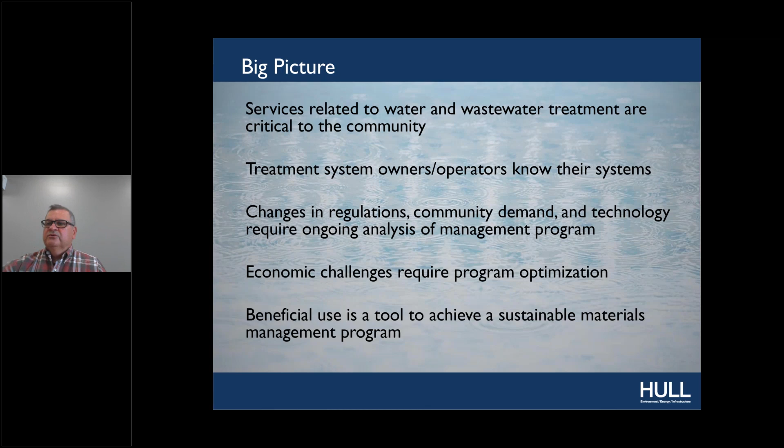Today I'm going to hit on two silos, one water and one wastewater. There's some overlap between the two common themes, but I'm going to separate water from wastewater and go from there. What's not included today is system design, process analysis, special technical cases—I'm sticking to big picture views of material management as it relates to waste from both processes, water and wastewater.

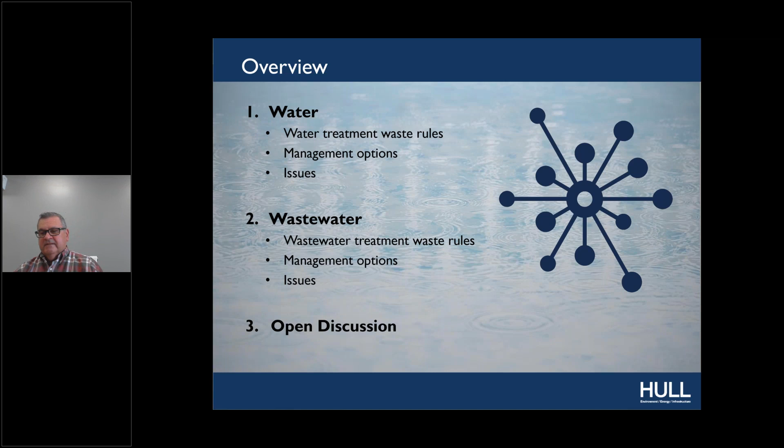So we're going to hit on a first question. I've embedded four of them here. I'm not sure what order they'll end up with other questions, but I'll turn it back to TMACOG to pose the question. This first question is: are you confident that you understand your water and wastewater waste management programs and are planning for the future? The potential answers are yes, somewhat, no, or not sure.

And Bill, while we're waiting for those responses to come in, I've got a question for you. Can you give us your opinion on how you think Ohio EPA is embracing beneficial use and how their perception and willingness to support beneficial use has evolved?

Sure. I think from the biosolids program on the wastewater side of things, beneficial use has always kind of been embedded in the program, or has been for some time. So I think taking some of those principles, some things they understand about risk and waste diversion, and really the regulated community reaching back saying we need tools in our toolbox to manage materials safely and responsibly but look at the economics—I think we've come a long way with the agency. I'll hit on it in my talk, but they started beneficial use byproduct rules, the 599 rules, a couple years ago after a lot of encouragement from the community, and they've had a great response on beneficial use of some high volume, low toxicity materials in their rules, really looking at equivalencies between raw materials and some things perceived as co-products, byproducts, or waste materials. I think they're really jumping in and helping people within the framework of the regulations to apply beneficial use principles.

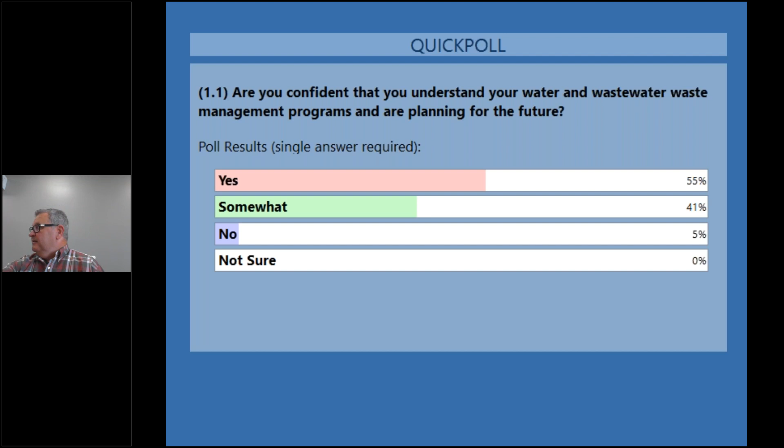Okay, well I'll jump ahead then. Some of these questions are softballs, but I think they kind of fit and frame the talk. We can talk more later.

So I'll jump into the drinking water treatment material section. Some people use the term treatment residuals, some people use material. EPA uses the term drinking water treatment material. I've listed here, from our process engineers, common treatment methods applied to drinking water. Technology is evolving, but really there's a variety of material or waste generated as part of the process.

In the context of Ohio EPA's general permitting program, which I'm going to discuss here, I have a definition posted calling these materials byproducts, but the real focus here is on lime softening materials, or spent lime.

Some of these materials that are generated aren't spent lime, and they may end up in a landfill. They may be recycled. You may even have liquid waste that you manage differently. But the lime softening from this common treatment process, the spent media that comes from this, is really what we're focusing on.

So about a year or two ago, I talked to a TMACOG water quality committee. I was invited to talk a little bit about beneficial use, and I was really amazed at the interest and knowledge base with the operators, the plant operators. They were really on top of what was happening with Ohio EPA's beneficial use rules, and we were also able to flag some of the evolving needs or ideas they were dealing with.

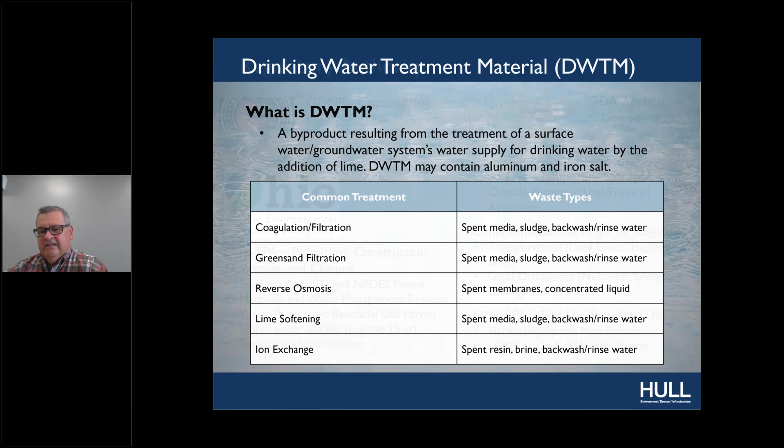When it comes to regulatory authority, when I talked to the group a few years ago, I just threw up a list, and people in the water treatment operations business can deal with a lot of regulations and different regulatory agencies. Some apply to everybody, some apply to one person, anywhere from dealing with ODNR, if you have dam permits with your impoundments, or ODA when you're looking at your liming permit. And EPA has a whole slew of ways they can get involved, cradle to grave with your operation.

But I think largely focusing on what EPA is doing with their beneficial use rules is what we're going to hit on today. And really for the wastewater treatment plant people, they're dealing a lot more, not with the solid waste group who are doing beneficial use, but more so the NPDES surface water group at the agency.

So when it comes to drinking water treatment material management, really you could beneficially use the material, you could landfill it, or you could recycle it. And within the context of beneficial use, land application for agronomic benefits is by far the highest volume, most preferred method.

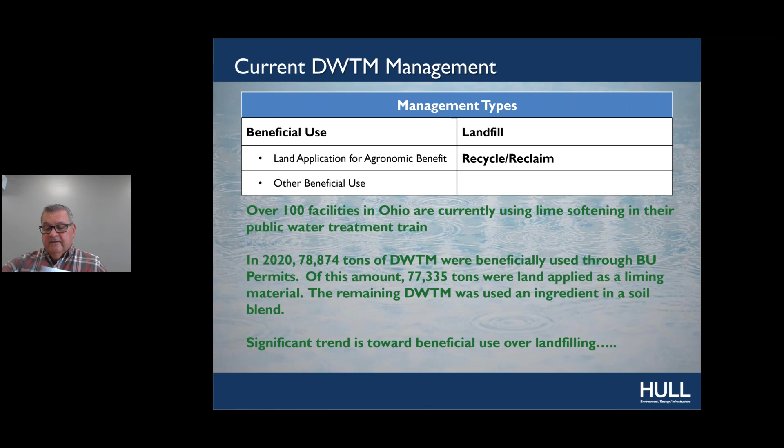So here we are. Some of us out there, maybe some people in this group, really communicated for years with industry, Ohio EPA, and municipalities about beneficial use rules.

The wastewater people with biosolids really engaged the concept of beneficial use earlier. When it came to the drinking water treatment material, which is a solid waste and regulated, it needed to fit within the context of some new regulations. So I've cited a rule here that applies to five waste streams. These were high volume, low toxicity materials that the Ohio EPA had identified. They felt they had a lot of data to experiment with rolling out these 599 rules. What the rules did is allow you to work with these materials and turn them into a beneficial use byproduct and not be a waste anymore.

So you can see that item 2 I've highlighted there really applies to the public water systems.

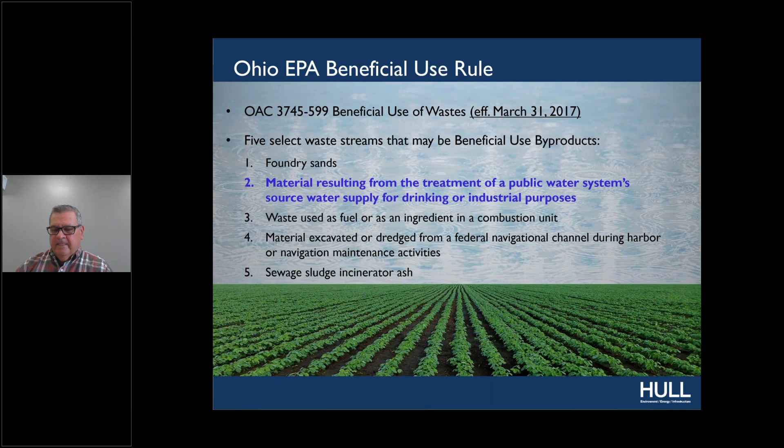EPA defines beneficial use. Again, you'll find different definitions in different places, but it really involves the substitution of these materials instead of virgin materials into an application. The material has to have a functional benefit to the end use. It can't constitute disposal, and it can't cause pollution in waters of the state. So those were the overriding principles when they were developing the definition.

I will say that there is a way to beneficially use materials in non-agronomic applications, and the 599 rules have a kind of a cutout for using this material in construction applications beyond agronomics.

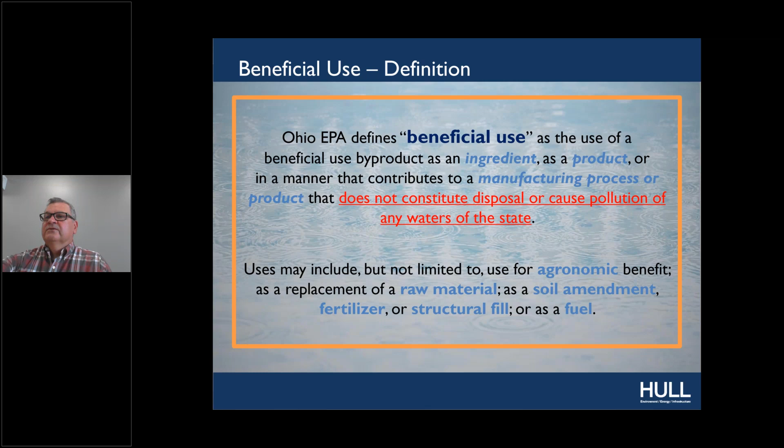I would say here that beneficial use is very green, and some people are stuck in their old ways and consider it beneficial disposal, which is wrong. It's really that we're conserving resources, being responsible with our resources, conserving landfill space, and really providing an agronomic benefit using the liming material to condition our soil in agronomic applications.

I've always said to people, and sometimes they're sick of me saying it, but this used to be: a waste is always a waste, and there was nothing you could do. There were some programs out there, the IWAMP and LAMP, but the material was still considered a waste. These 599 rules that came out allowed us to call these drinking water treatment materials a beneficial use byproduct if it met the criteria specified.

I think that branding is important. I think it's important for the community to know that this is really a green practice we're applying. It's done responsibly, and it's just a good thing. I don't think we're so good at touting that. I think it really helps us with sustainability - we're avoiding the depletion of natural resources to maintain an ecological balance. That's what people call sustainability.

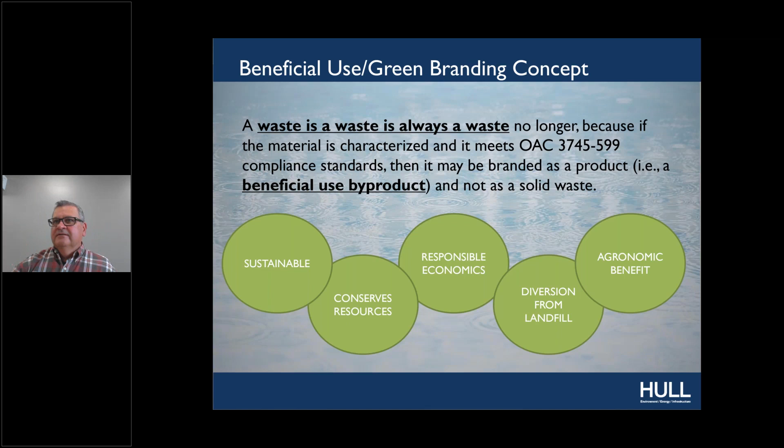There are three pillars of sustainability: economic, social, and environmental. I think our beneficial uses hit on all those things. What helps us economically and gives us a management option to land apply for agronomic benefits really fits well with sustainability. And I would qualify that regardless, less and less landfills are interested in receiving this material. I think it's going to be a challenge for all of us in the future, and we may need to adapt and do some planning.

So with that, we come to question number 2. This is asking if you would consider beneficial use for your drinking water treatment material, based on your current understanding of Ohio EPA's programs. So that's a yes, no, or maybe for this answer.

Bill, you talked a bit about the regulations and the administrative code. Do you think there's room for improvement in these beneficial use regulations?

Well, I do think that based on people characterizing their materials they want to beneficially use, and based on some success stories, the program can be improved over time, and it will. So there's a 5-year rule review required of the EPA, and they're currently getting into that for the 599 rule. That will come forward here in a minute.

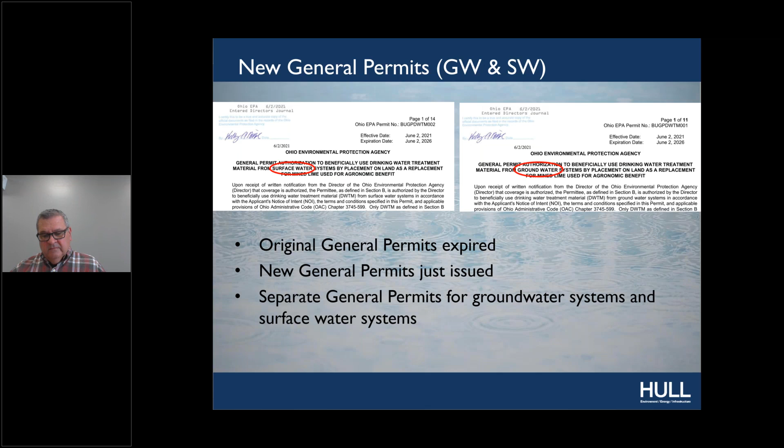Thinking about this, we'll just move on to the next one so I don't get caught up here.

As far as the general permit, I want to say I have some information here. EPA, as they're releasing these general permits, I've been talking with them. They were helpful providing some information I've lifted from a presentation they're rolling out on their YouTube channel - they've recorded a training program as these general permits come out. Again, I've borrowed some information; Harry Sarvis and the team were very helpful with sharing it.

The key components of what's in the general permit I've listed here. I won't read through them, but I feel they're the same as the last general permit.

I think they considered some comments AWWA members included in there. I think that some people still feel things are conservative, looking at some of the microcystin and some of the setback criteria. But I think this will evolve with different iterations of the rules over time.

I think it's still not taking a lot of time to turn around authorization of the permits, and they won't under the new program. As of 2020, EPA issued 20 beneficial use permits for drinking water treatment material. Of those permits, 15 were general and 5 were individual. Since the new general permits were posted on June 2nd, 2021, they've issued 4 coverage letters. So people are embracing this.

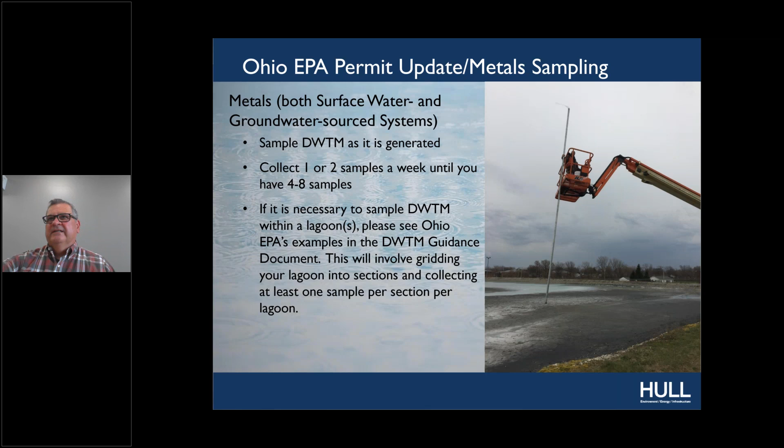Microcystin, I just had a slide from one of our risk assessors here, but you all know that a few years ago with the cyanobacteria in the lake and the resulting microcystin, which is a toxin, people had a concern about post-treatment of water, what's in the residuals, and are we concentrating microcystin that will be land applied. Ohio EPA worked with OSU and others, and I think it's not as big of a problem as anybody had a concern with. I'm sure somebody might want to argue with me, but I think it's fine to monitor for. You want to comply, and there will be some loading criteria that will get applied for soil where microcystin is detected.

So there is some microcystin sampling. Again, I don't want to dig into this at this point, but you're going to sample your materials as they're generated. Also, if you're going to go into your lagoons to harvest that material for land application for agronomic purposes, you're going to have to look at the date when you last emptied your lagoon and modify your sampling approach accordingly.

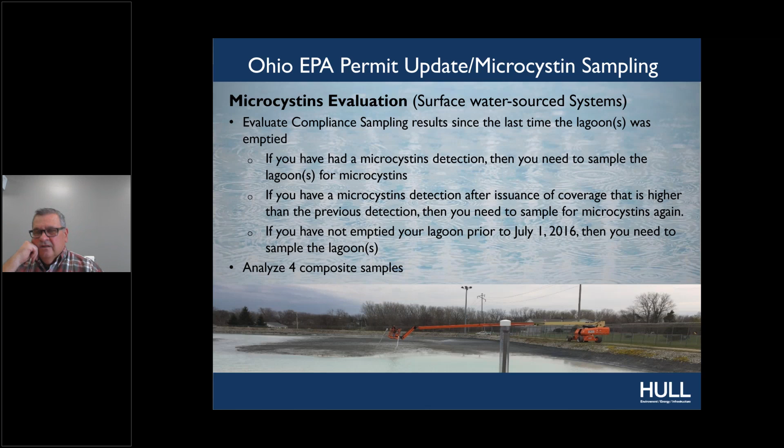When it comes to looking at your data, EPA has listed compliance limits for metals. They came from the US EPA RSLs, some of the US EPA 503 metal levels, and then there's some, I call them arbitrary limits for some individual parameters. I don't see that people have a hard time meeting these concentration-based limits, and the EPA has also confirmed that.

Then based on your microcystin results from your testing, again for surface water sourced systems, there's some loading criteria they've applied. I don't think anybody will have a problem meeting this, but they did look at the tonnage you're going to apply and consider loading and come up with a microcystin limit. So that's all pretty straightforward.

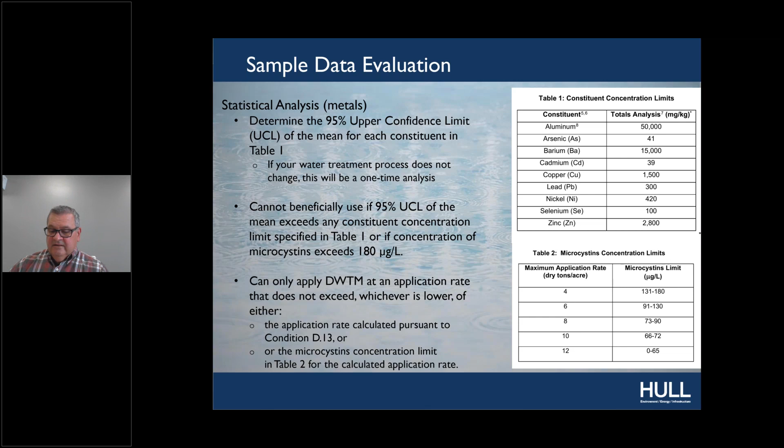And then there's some things that EPA is communicating on land application conditions as far as setbacks from wells and waterways, 33 feet from surface waters. I think philosophically, if this material is looked at just like any other product, we really shouldn't limit how or where we use it. But I understand that we do want to be responsible, and sometimes having these criteria make people more comfortable, or there is an environmental reason for doing that.

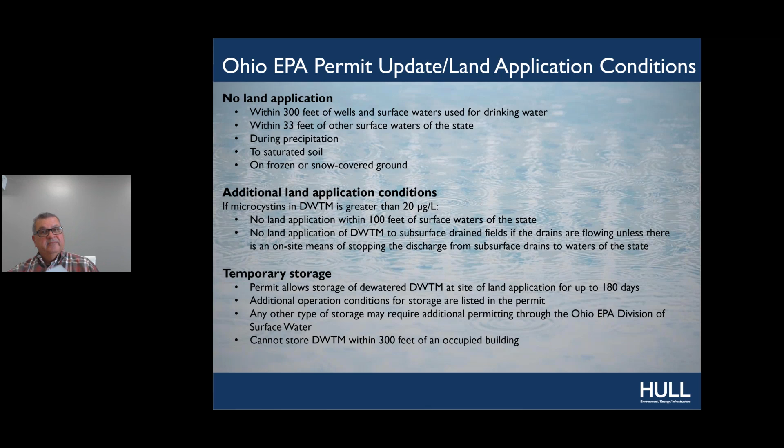But with land application, I view beneficial use byproducts as safe to use anywhere a regular product is, as long as your proper engineering controls are in place. There's some land application additional conditions about setbacks, about fields with drains, and then there's some things on temporary storage that need to be considered also.

And then with record keeping, as under the general permit, you're going to have to keep your records for 5 years. You're going to have your liming permit in hand. This is all things you just keep a file of, and you submit an annual report April 1st.

I don't think it's too cumbersome. They've tried to streamline what they need to have reported, and I think some people work with the agency over time to talk about that.

So that's really bringing me towards the end of the water portion of this talk. There are some emerging issues out there. There's a lot of lime being produced, and there's limited landfill availability or interest in accepting these materials. I think planning forward, we need to look at alternatives or different management strategies, or if something new needs developed.

I think that blending materials, when you're beneficially using the material, sometimes you don't meet product specifications. Sometimes you don't meet use compliance standards from a concentration basis, and EPA's allowing you to blend materials to meet your specifications. So the microcystin issue is before us, and I think we'll stay there for a while.

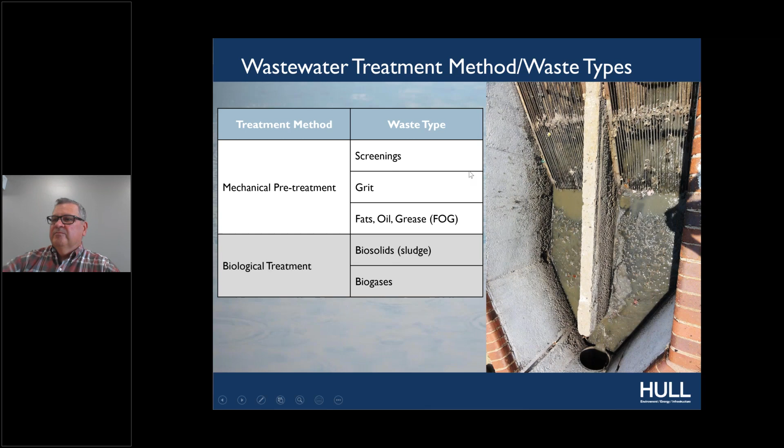Ohio's biosolids program, administered by the EPA, addresses disposal and beneficial use under biosolids regulations. They want to protect, encourage beneficial use, and minimize any nuisances from odors. I think that's a pretty straightforward statement from the agency.

So there's a fair amount of material being generated that needs to be monitored. I think that... let me just move on there.

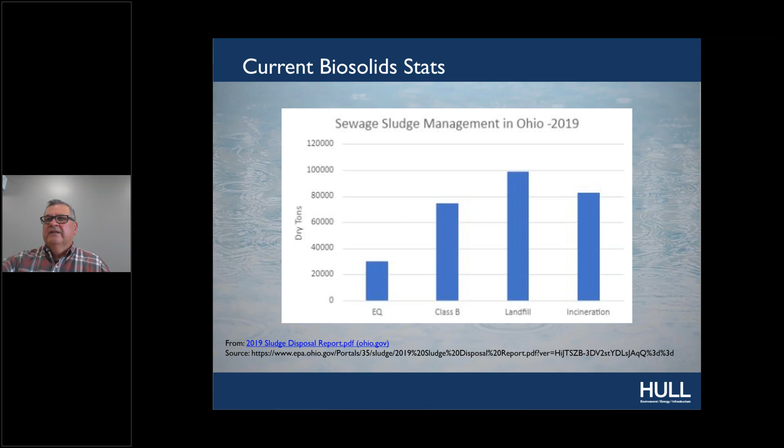As far as regulatory authority, we see the words sewage, sludge, and biosolids. Everybody here knows this, but basically biosolids is sewage sludge that's been treated for beneficial use. Some people use the terms interchangeably. They're different, but similar or a subset of each other.

The most recent sewage sludge rules were part of the 5-year rule review. December of 2018, they became effective, so they won't be looked at again until 2022, to be effective in 2023. They clearly list out the standards for treatment, storage, transfer, and disposal of biosolids, including beneficial use.

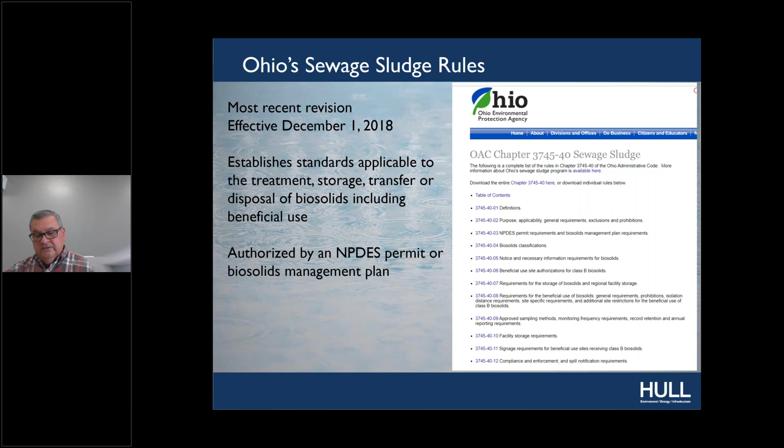So I would say sewage sludge can be managed in a landfill, but a lot more people over time are moving back to land application for agronomic purposes. Once the biosolids are ready for beneficial use, they could be land applied if it's authorized. Again, a very sustainable practice.

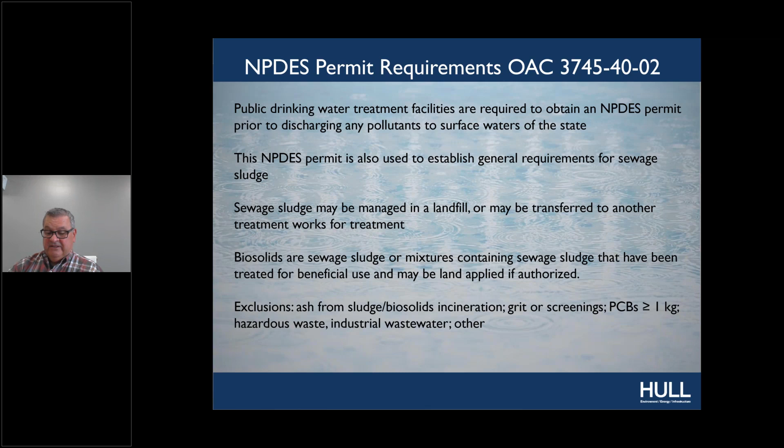There are some exclusions out there. Your grit and screenings and stuff still have to go to the landfill.

Under your NPDES permit, you're required to include a list of material in your permit application—everything down to your volumes. There's some material characterization, sampling analysis, information about your biosolids, and there may be some permit-specific conditions in your NPDES permit that address use of Class B biosolids and some other items.

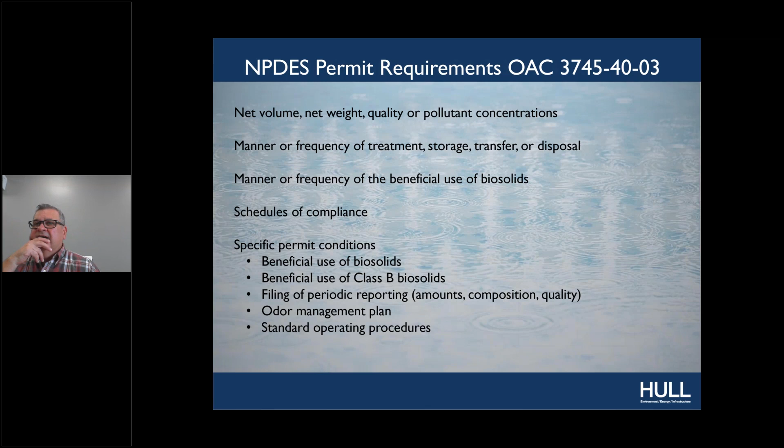I've always heard terms about Class A, Class B biosolids over the years, and then over time this term exceptional quality came out. So we either have Class B or exceptional quality biosolids within the context of these regulations. While there's a million different iterations of how you fit into classifying your material, there are some key factors.

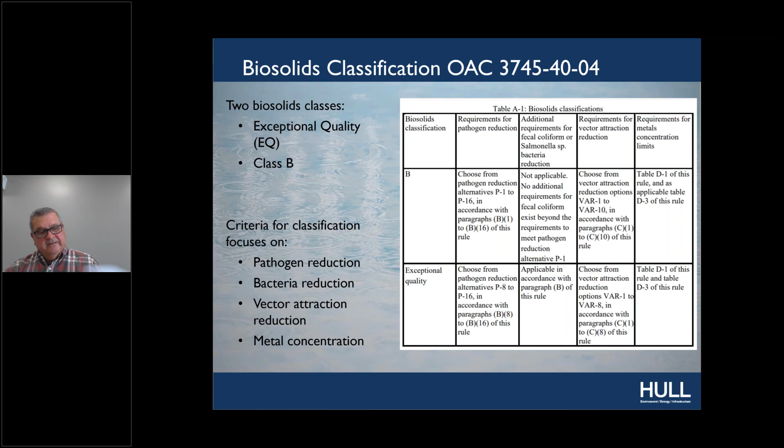These look at pathogen reduction, bacteria reduction, vector attraction reduction, and of course the metal concentration limits. When you characterize your material to comply with the rules, you'll know your classification, and then you could look at the beneficial use of the material and what your compliance criteria are going to be.

Before you can beneficially use your biosolids, there's a list of items you have to cover, from submitting notice of where you're going to use it. Each field for Class B will have to have a separate authorization.

You need information about location, some information about the soils where you're applying the material, the slope, setback criteria, and some things about the history and recent test results. Nobody knows this more than you guys, but it's still in the rules—pretty clear on what you have to characterize to make sure you apply materials in the appropriate place.

I've listed this information with storage of the materials in the field. There's criteria on how long the material can be in the field, what your setbacks are, and it's based on your biosolid classification.

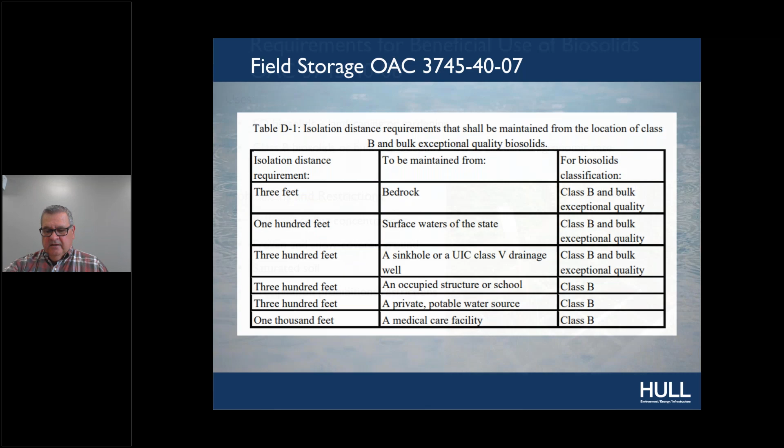As it comes to uses, the exceptional quality biosolids—the really good stuff—can go to landscaping, gardens, or be used in agronomic applications. Class B solids can't be used for landscaping and gardening, but you could land apply it based on a calculated agronomic rate. Pretty straightforward—you guys have been doing this for years.

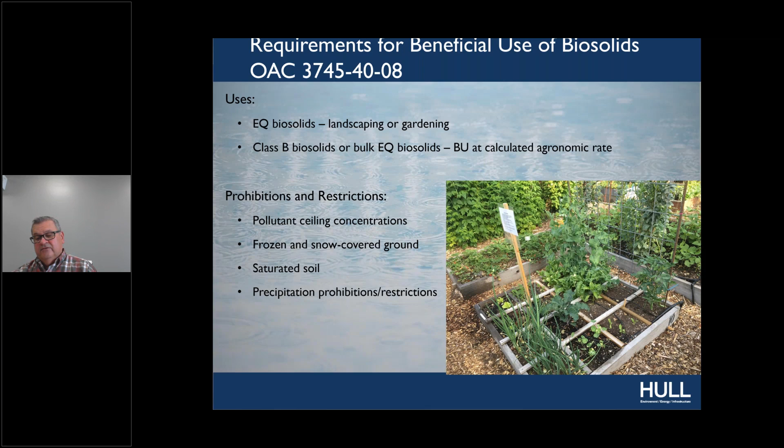There are some restrictions about how you place it on saturated soil, snow, precipitation events, and of course your potential pollutant loading. There's also an isolation distance required for biosolids.

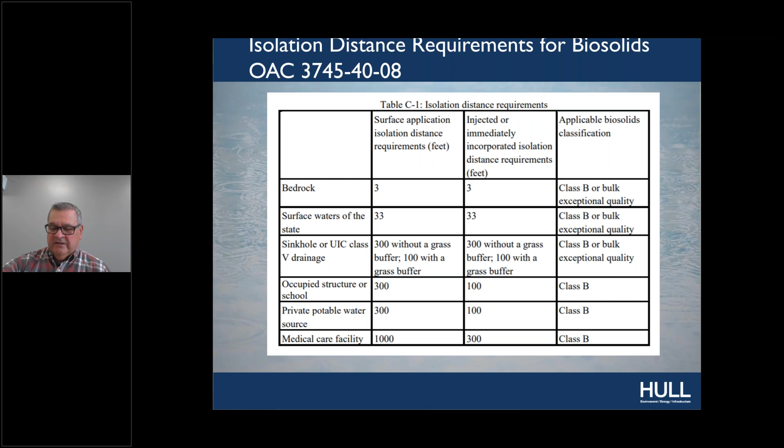There's just a little reminder chart—this whole packet is a nice little condensed package. There's some sampling methods and frequencies based on the monitoring frequency. You have to monitor based on the frequency in your NPDES permit, as well as based on the volumes you're land applying.

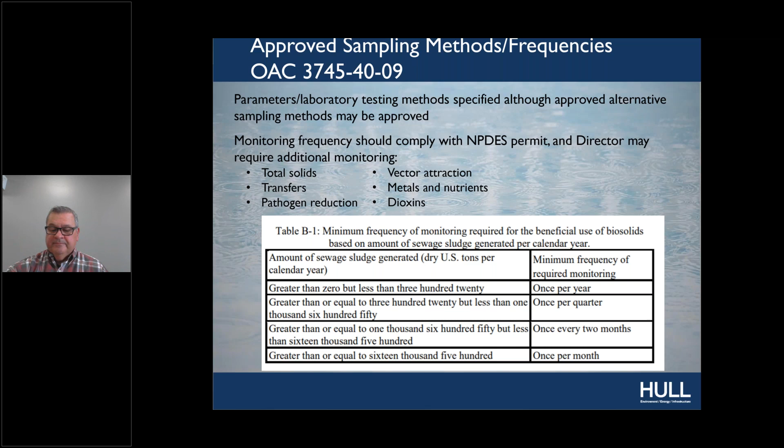So some issues I see out there, similar but different from the water side of things. On the wastewater side, in your material management for biosolids—again, PFAS is on the list.

I've added pharmaceuticals to the list. Some people are interested in studying that further and understanding different pharmaceuticals that end up being processed through your system, if there's any residuals in your solids.

And also funding is always an issue out there. So I think with our partners in land applications, you need to make sure everything's applied correctly and we're meeting the setbacks so we don't get a bad name or a violation for how we're managing our materials. And as infrastructure ages, looking at your dewatering facilities, are they aging, is technology changing? What can you do to better manage your material, have a drier material that you might be able to feed into the commercial market? There's always this challenge of what's going to happen to the regulations in the next 10 years and how does that fit with your plan?

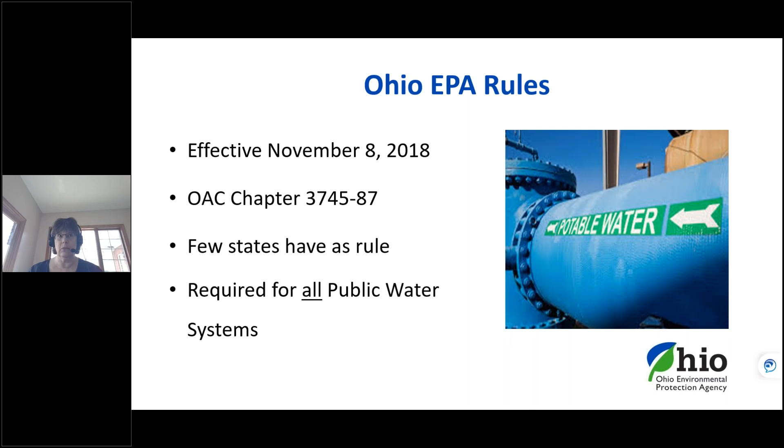The asset management rule's goal is for the water system to better prepare for the future. We also want our water systems to have money saved to pay for the maintenance, the repairs, the rehabilitation, the replacement and upgrades needed to run an adequate water system. We do not want water systems to rely on grants and emergency monies to make all of their repairs. Asset management programs are to ensure the long-term viability of an asset management program.

Public water systems need to do an annual review and update their asset management program as needed. Ideally, the asset management program is to be a living document and to be used to make all decisions for your water system.

So our first polling question: when did the Ohio EPA Asset Management Program rule become effective? The options are June 25th, 1839; November 8th, 2018; October 23rd, 1972; and December 2nd, 1970.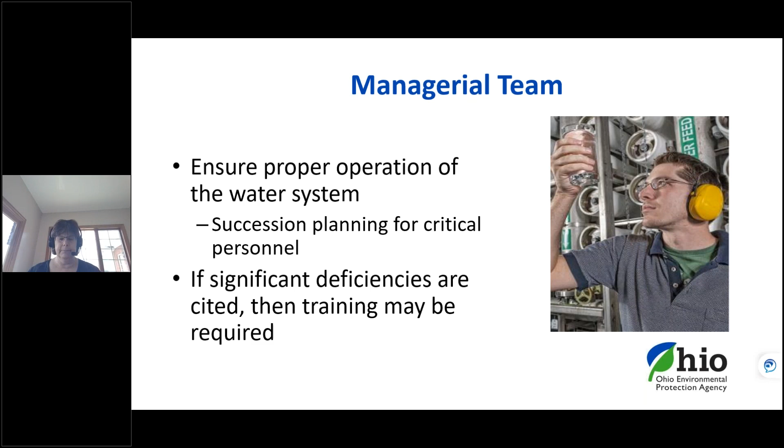Next we have our technical members that would provide the technical capability of the assets, such as the current operation and maintenance of the water system assets. This basically is the heart of the program.

We're going to start with a schematic. As you see here, we have a schematic of a surface water system. So we're going to look at the source - where is the water coming from? Is it coming from the wells? Is it coming from the reservoir? Is it coming from a lake, like this example? Or do we get water from a nearby community?

Then we need to show the components - we need to list out the components that we have in the water plant, like the clarifier, the filters. Do we just chlorinate the water? Whatever it is, we need to include it there. Then we need to move out into distribution and include our towers and our booster pumps if we have that in our system.

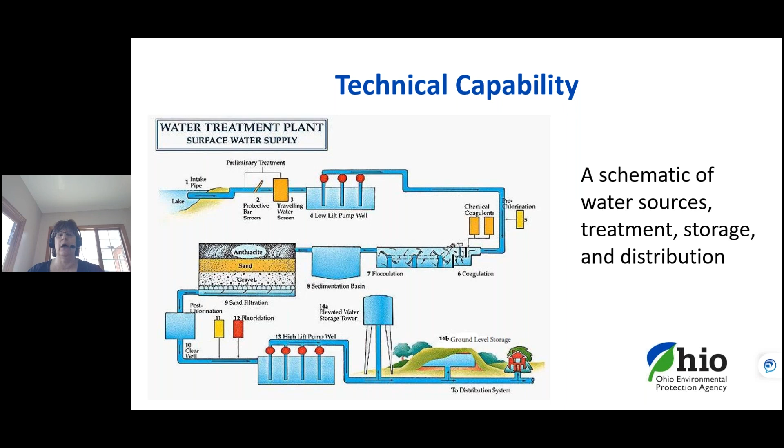So the first step in managing our assets is to do the inventory, and this basically is the crucial part of the system. You need to do a list, and then you have to do surveys of your assets to assure what they are. Again, we're going to include our source, our treatment, our transmission lines, and our distribution infrastructure.

So the best thing to do is just ask ourselves, what do we own? Literally write them down - when were they installed, what was the purchase date? Because some of this information has been lost over time or is difficult to find, we need to use our best estimate. Eventually, as we rehabilitate and replace these assets, we will update our inventory and this information will be more accurate.

But the assets we're going to include would be the water plant building, the wells - you can write down wells, or you can write down well 1, 2, 3. To begin with, the simplest thing is to just write down wells. The treatment - at least identify what that is, that you have filters, softeners, the different types of treatment we have. You can group your high service pumps together, or individually put them out.

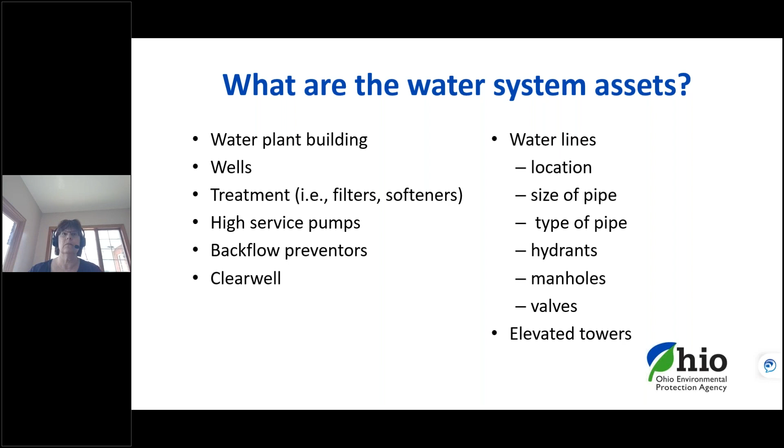Ideally we want this in a digital format, for ease of updating and also being able to share it with Ohio EPA or between departments, because a lot of times your water plant and distribution system personnel are different, and we want to make sure we can share information back and forth.

Once we have our assets written down, we need to determine the condition of our assets. The question to ask is, what is the condition? Is it in excellent shape, good shape, fair, poor? Does it need repair or replacement? Do we have a history of maintenance on this asset? Are the repairs written down?

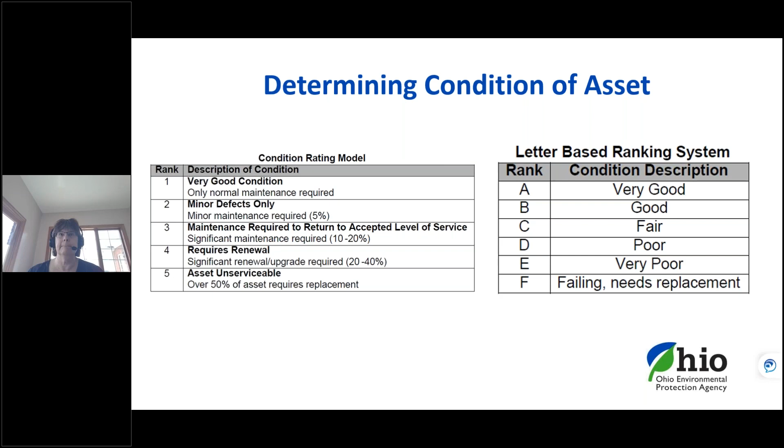Then we want to know the remaining useful life of our assets. We need to estimate this based on the current condition and performance of the asset. All assets will eventually reach the end of their useful life, some sooner than others. Depending on the type of asset, it will reach that point through use or length of service. We can determine remaining useful life by projected useful life tables or decay curves.

For example, a pump will wear out sooner if used on a continuous basis, and will last longer if used less. This is why we alternate pumps. Normally we have 3 pumps, though there's only 2 here, but we alternate back and forth by each cycle, or each day, however you're doing it, just so that pump has time to recover.

So basically on pumps, we don't use the age of the pump, we use the hours that that pump has been used. But on the other hand, on a water pipe, we're going to use the number of breaks that we have on that line.

We're going to look at the soil condition. We're going to look at how it was installed. A lot of times we know by the year what type of pipe it is. We know that some of the cast irons and ductile irons, there's a difference between older ones and newer ones. There were problems during World War II where the type of metals used were different than they would have been used early on and as of today. A lot of this information too, you can use pipe ID to help determine.

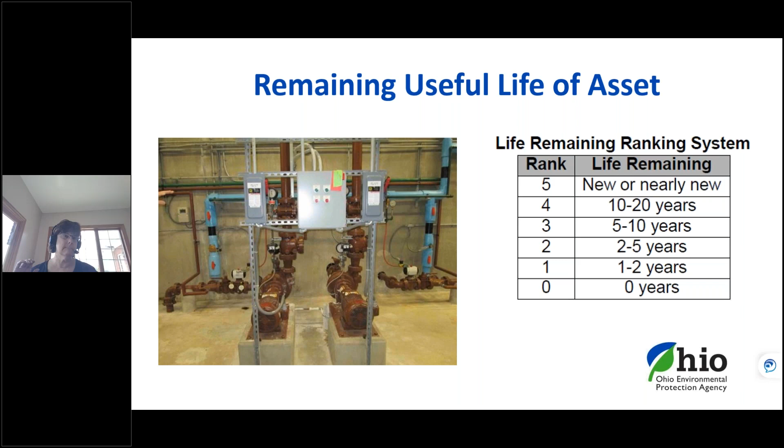All right, so true or false? You don't need a team to do an asset management program for the Ohio EPA.

And Jill, while we're waiting for those poll responses to come in, just one question for you. What if a facility does not know the age or the history of their treatment plant or any of their assets?

If they don't know them, that's very frequent, especially on our smaller systems. The best thing to do is to just estimate. Over time, you will get to know what the age is because as you replace or rehabilitate it, you will get a more accurate asset management or inventory of that asset. But it's not a problem—just go on, do the best you can, and move forward.

Great, I'm sure everyone appreciates that flexibility. Sarah, how's the poll?

Everyone has answered, so I will share those results. All right, looks like 68% said that it's false, so that you do need a team for your asset management program.

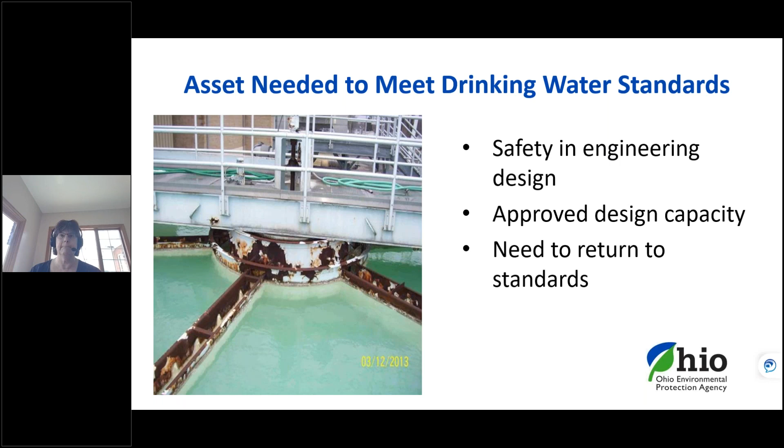Also, most water systems receive violations due to not being able to meet the current standards. This could be in the form of the fact that the pump is in disrepair. A lot of times that's because we haven't set aside money to do that. Other common violations are the fact that we haven't cleaned out our basin recently, or we haven't checked those basins.

Again, this could be because sometimes we don't have the redundancy. We can't bypass that basin to take it out of service to do that. This is why redundancy of our treatment system is very important. This is also why we need to do repairs as quickly as possible.

If you find yourself in a situation where you're having problems, you need to talk to Ohio EPA, and we usually work with you to come up with a timeline of when you're going to get that repair, the replacement, or the rehabilitation of that asset, to make sure that we're all on the same page.

Once we know the condition, the remaining useful life of the asset, we need to prioritize our assets, and this is based on the criticality and the condition of the asset. It is critical that we know which ones are critical components, like, is it the well that we have to have? Is it in poor condition, or is it in need of significant repair?

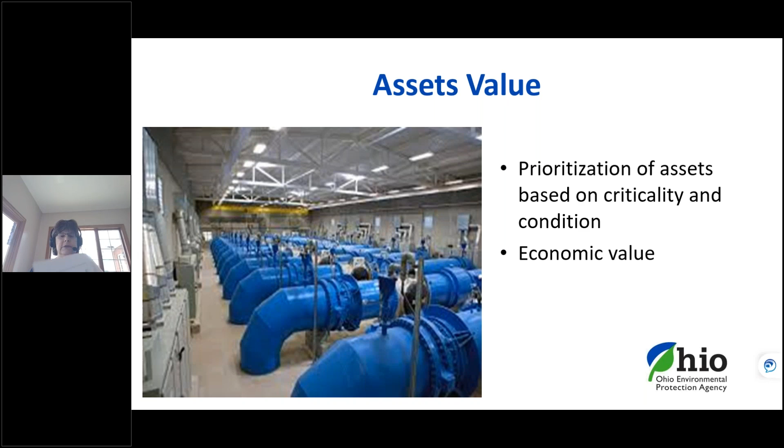Then the financial members will provide the funds needed to maintain and replace the asset. In order to demonstrate adequate financial capability, the water system should include a long-term funding strategy to support asset management planning implementation, including but not limited to the identification of the sources, the amount of the funds to finance the needed repairs, the rehabilitation, and replacement or expansion of those assets.

We also need to look at the debt services. You need to know what your funding programs are. We do have loans out there. You also could be lucky enough to get one of those grants.

And like Bill just said, President Biden's American Rescue Plan is out there in the state of Ohio, that is being implemented by the Department of Development, and that's going through the county engineers. We were hoping that we were going to get some of that or be part of that implementation, but we weren't, so we have to rely on them.

Sound financial decisions in developing an effective long-term funding strategy are critical to the implementation of your asset management program. Knowing the full economic cost and revenue generated by your water system will enable you to determine your water system's financial forecast. Your water system financial forecast can then help you decide what changes need to be made to your system's long-term funding.

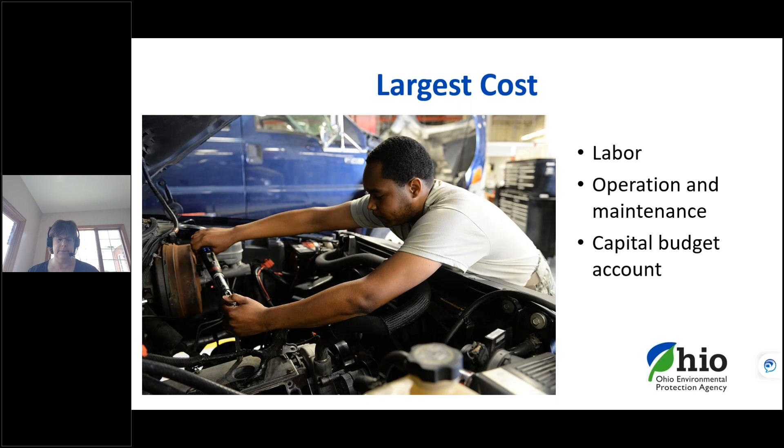Whoops. Got a little trigger happy there, sorry.

With best practices, we need to move from reactive maintenance to preventive or proactive maintenance. We need to know the costs and benefits of rehabilitating versus replacement, because you don't always have to replace, or run it until it needs to be replaced. We need to look at the life cycle cost, especially for critical assets, deploy resources based on asset condition, and analyze the cause of asset failure to develop specific response plans.

Proper O&M of the system's assets are necessary elements of an effective asset management program. Proper use and service of assets are important to the long-term viability of the water system. The O&M strategy varies based on each asset's components, criticality, condition, and operation history. A system should maintain a record of each asset's maintenance, history, needs, and cost.

This component should discuss the system's operational activities, for example the basic activities needed to keep the water system running, and the maintenance activities, such as activities that keep an asset in good working order. These include standard operating procedures, alternative operating procedures, emergency procedures, routine maintenance, preventive maintenance, emergency reactive maintenance, and deferred maintenance. The plan does not need to include all of this information contained within the system's O&M manual, but it should refer to specific aspects needed to run your system.

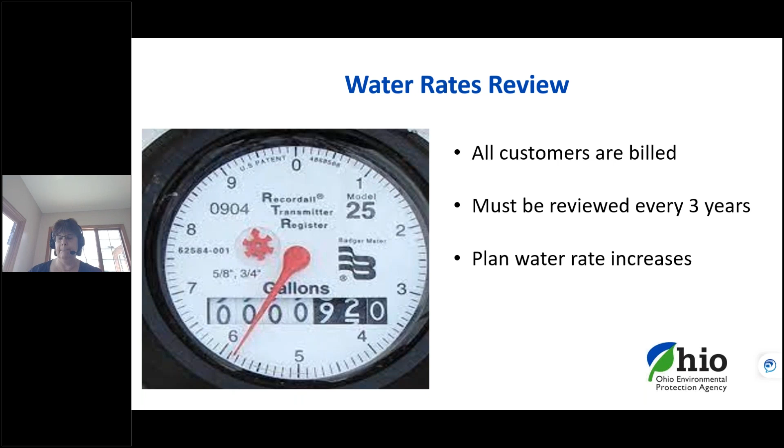Like I said before, you need to have a way of projecting for the short term. That's called a capital improvement plan, or CIP. You need to do an annual projection for a 3 to 5 year planning period. The rule requires that you list what project year it's planned for, along with the detail of each project.

You need the need for why you need that project, the estimated cost of the project - to include engineering, design and construction - and the funding source for that project. That can be that you're going to get it from loans, from your water reserves, or you're planning to get the free money from the American Rescue Plan.

Unfortunately, we don't know how fast this is going to go through. There's funds there, but we don't know how fast Ohio is going to get it, and we still have to rely on the Department of Development for that. We were hoping that we would have control of that, because we as Ohio EPA know where our needs are for water, as well as our surface water division knows where the needs are for the surface water plants also.

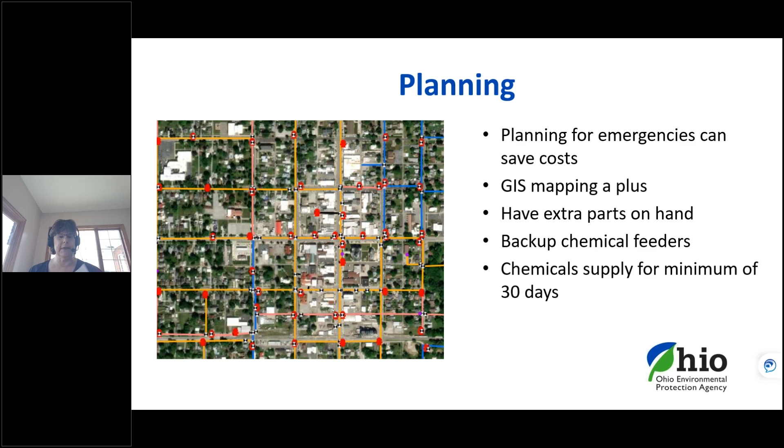The next thing we have, check the time, come on.

I have 5 minutes. The next thing required in the plan is the source water protection plans. Basically, we want to make sure you're reviewing these every 5 years, with evaluations and revisions made as needed. If you have an endorsed water protection plan, you need to make sure you're reviewing it. If you have the checklist you've filled out for us, that requires you to review those every 5 years. You need to make sure that when you make revisions, you've notified Ohio EPA within 60 days. You can work in our office with Richard Krieger, who will help you with everything about that. Basically, we're just trying to make sure you're looking at that.

That takes us into poll question number 3.

So, what is the benefit of an asset management program? Will you save money over time, prolong the asset's life, improve your response to emergencies, or all of the above?

And Jill, I'll just ask a quick question while we're waiting. As you noted, we have about 5 more minutes in this presentation, so I don't know how in-depth you'll be able to get with the response. But in the last year with COVID, have you received any changes or updates to asset management plans to account for all the changes that COVID threw our way? A lot of issues that folks probably didn't realize they'd have to consider?

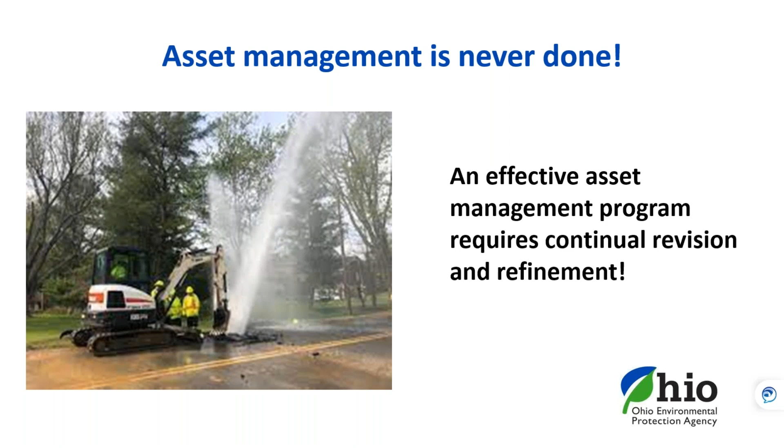Your asset management program is never done, and an effective asset management program requires continued revision and refining.

We do have loans, like I said. We have the water supply revolving loan account out there. It's available for planning, design, and construction. We take planning and design loans at any time. Construction loans are due every year by March 1st. We do a screening as part of your asset management program during that time period. Basically, we're going to relook at your asset management program, and everything I told you here is what we're going to look at. And currently, we have principal forgiveness for those lead line, service line replacement projects.

We still have money available, so if you have lead service lines, please put in for those loans. If you don't know, the new updated lead and copper rule by US EPA states that if you don't know what the line is, it is lead. The other thing is that Biden does have money out there, which we're hoping to see - he wants 100% lead out. Again, we don't know where that's coming from. We think it's going through the Department of Development. We're still waiting, just like you, to see where that's going to go.

More information is available on our website. If you go to our website, it's under asset management. Go to drinking water. If you can't find it, shoot me an email, I can help you find it. We do have an asset management hotline, the phone number is available there. And we do have an asset management email. Somebody monitors the hotline and the emails several times a day and will reply to you as soon as they possibly can.